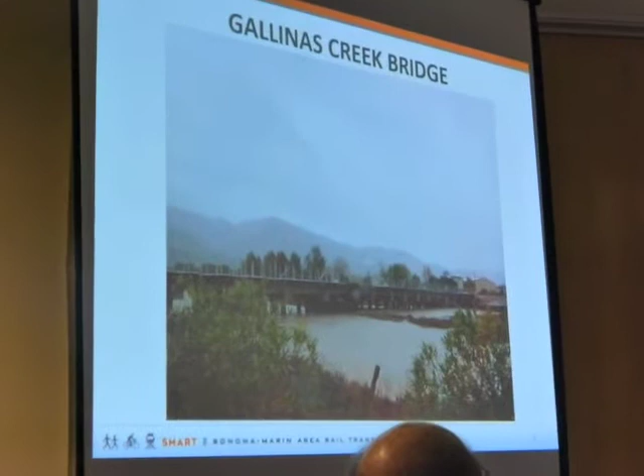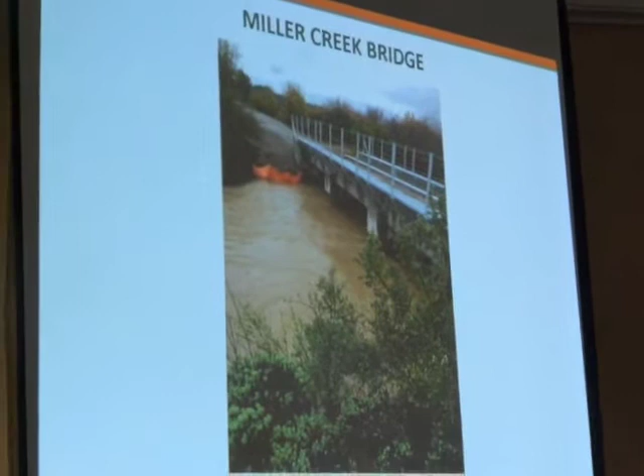Overall, our bridges did really, really well. This is Gallinas Creek down in San Rafael. We raised this bridge about 3 feet - you can see there's all kinds of freeboard under the bridge. Worked fabulously. Miller Creek, another success story - again, we raised this bridge about 3 feet. It used to go completely underwater before being replaced.

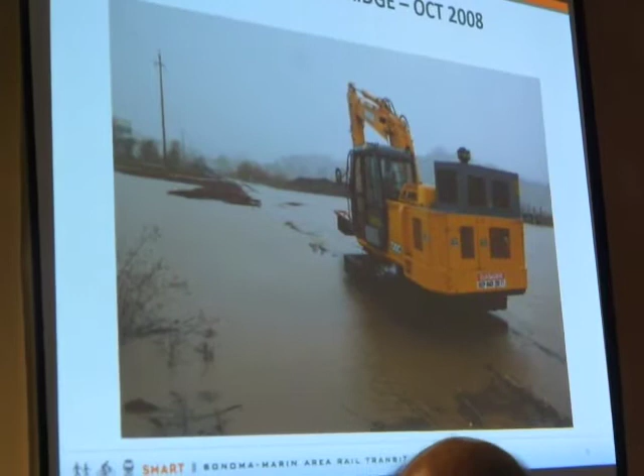Novato Creek - this is just back in 2008. Believe it or not, there is a bridge underneath there, you can sort of see the rails poking through. And here it is last week, accommodating all the water we had with room to spare.

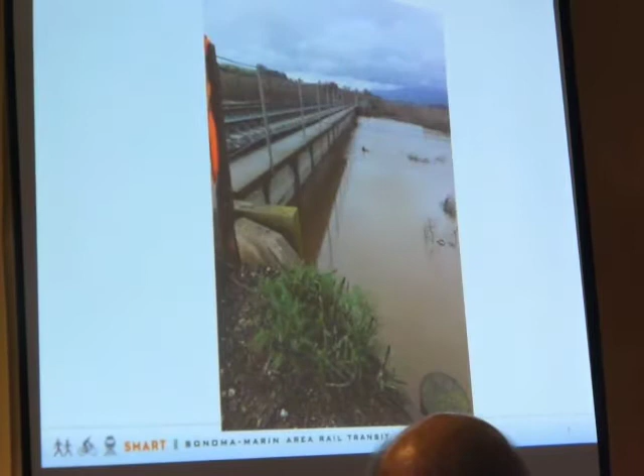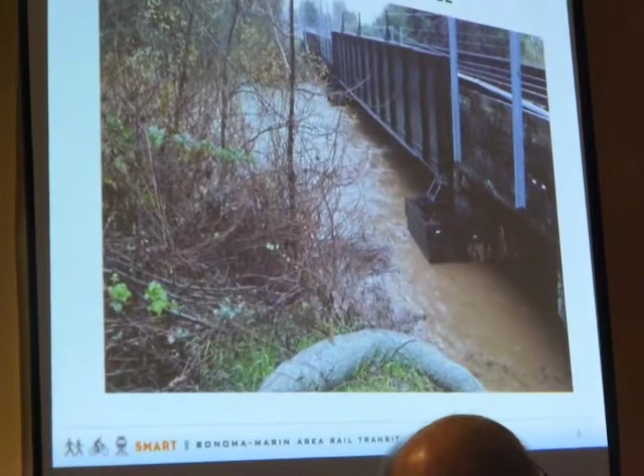Schultz Slough - this was a bridge we rehabilitated just north of the county line. Again, an area that's low-lying and sees a lot of water. And Mark West Creek Bridge, just south of our operations facility in North Santa Rosa. To put this into perspective, the bottom of the steel beam is probably about 15 to 18 feet above the bottom of the creek itself, so there's a lot of water moving through there.

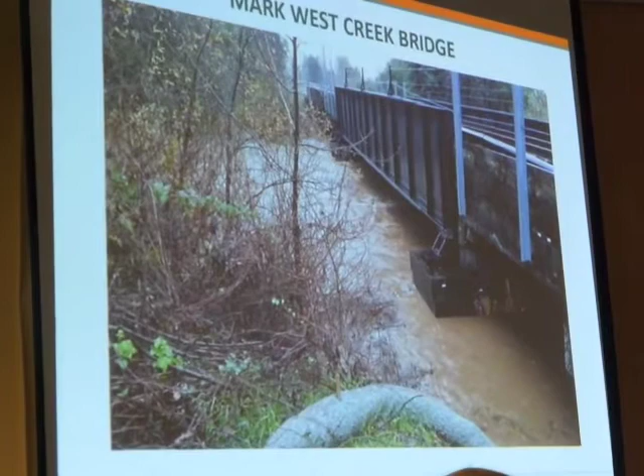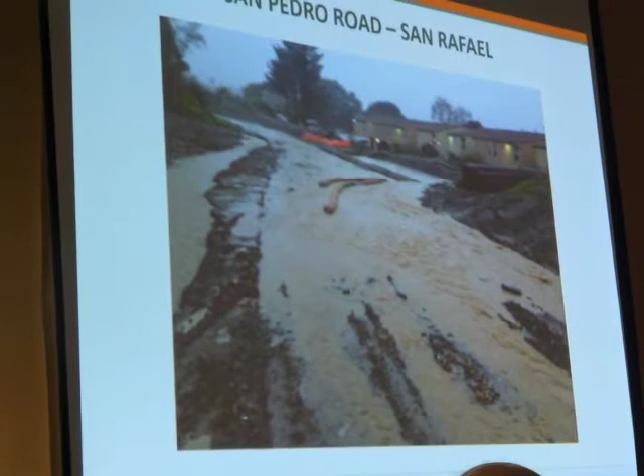So then we had some areas that really saw a lot of water and had some issues. This is San Pedro Road looking south - an area where we haven't finished our construction work. We haven't built track yet, but you can see there's a tremendous amount of flow going through there.

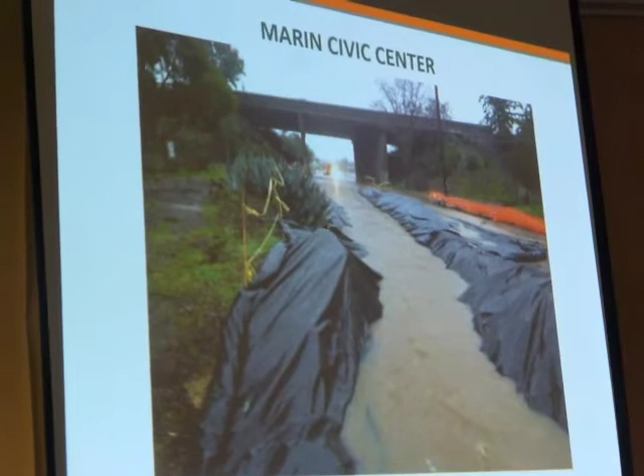Civic Center area, again an area where we haven't finished construction. It's low-lying and close to Gallinas Creek. Historically it's always seen a lot of water - nothing new for us. We haven't finished construction there. We're limited in what we can do because of the constraints of the adjacent roadway, but it's an area to keep watching.

Another shot of Civic Center Drive - the amount of water was unbelievable.

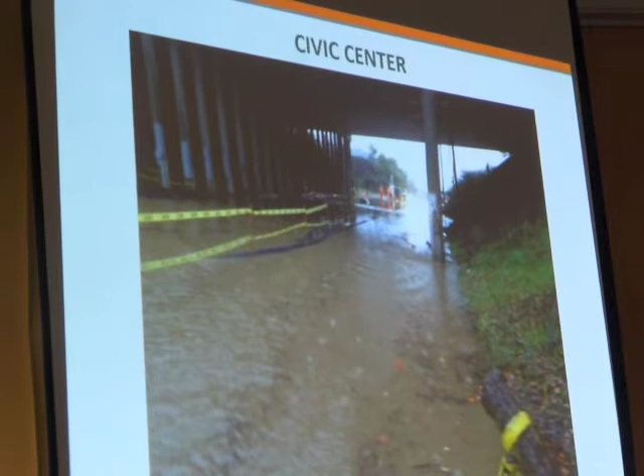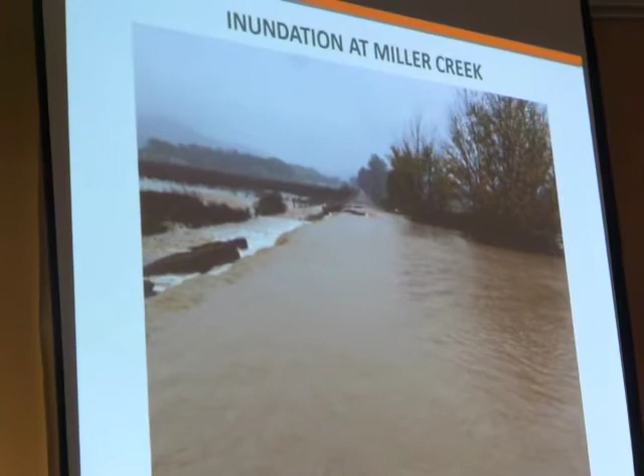This is just south of Miller Creek. Miller Creek had topped its banks. We're actually standing where the track would be constructed, looking south along the track there, and that's all water that completely washed over the top of our embankment. We hadn't built track yet, and that's the result - so an area that certainly needs some attention. Fortunately we haven't built track or finished construction there, which gives us an opportunity to address things like this.

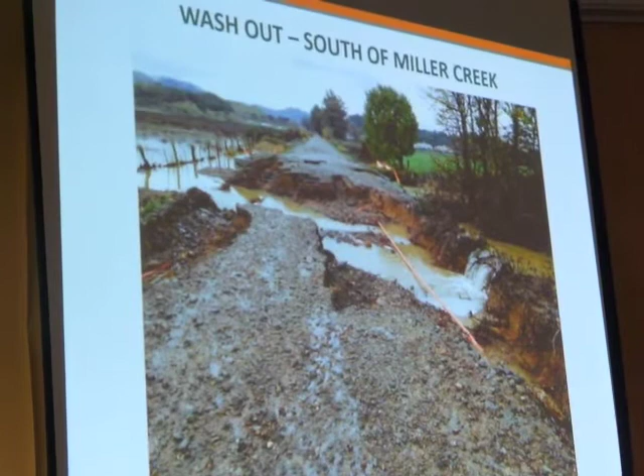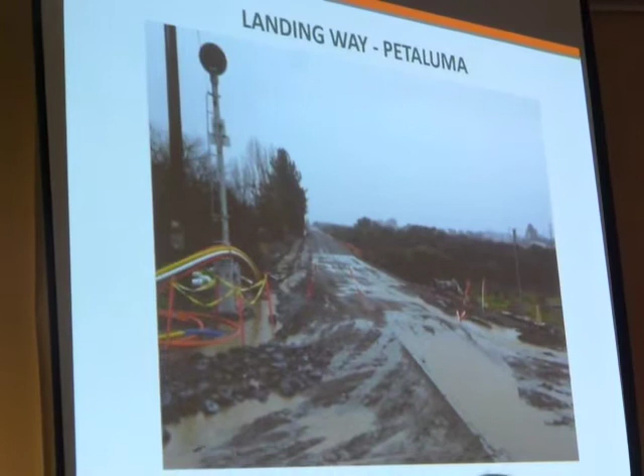Landing way here in Petaluma will always be a challenging area. Again, it's a very low-lying area. Drainage is a challenge - there just isn't much slope there, and it's also dependent on the Petaluma River because that's tidal and can only take so much water at times. Just a few more shots of the water accumulation there.

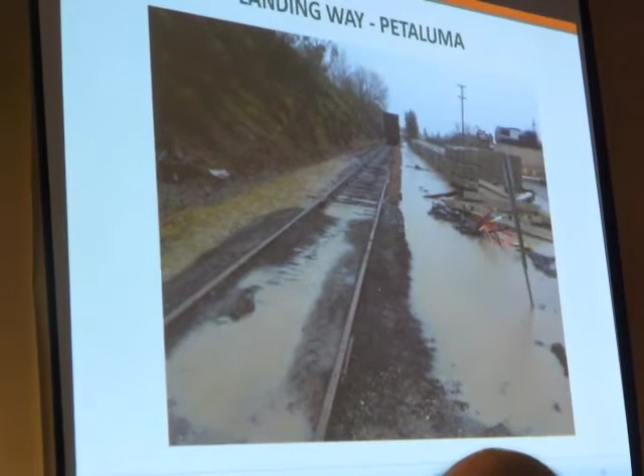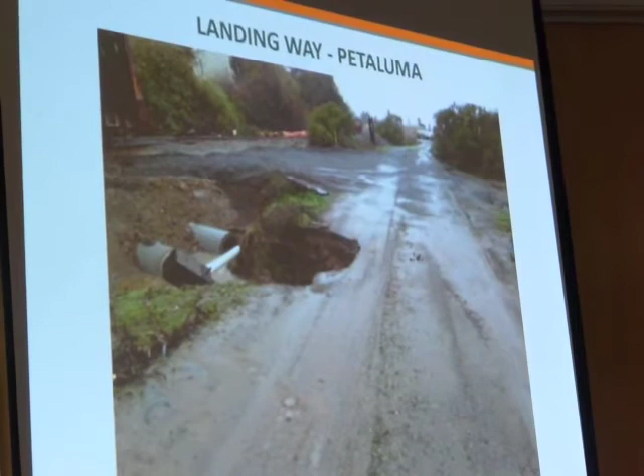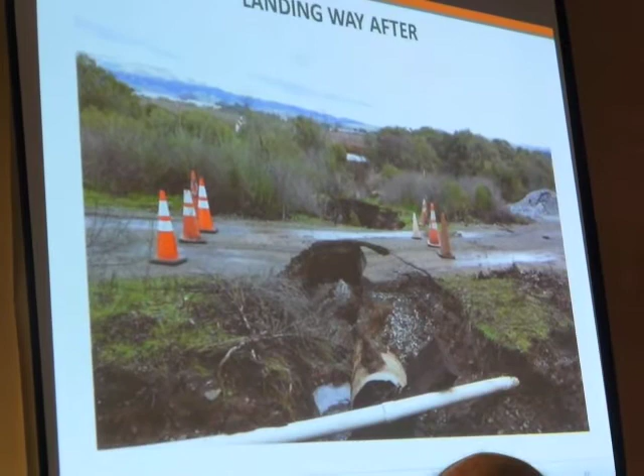As Farhad talked about, there are areas where we can only work within our right-of-way. So here, our track is in the background. We've replaced culverts to accommodate the drainage we can, and it's draining, working its way towards the Petaluma River in the background. This area has also been interesting because Caltrans is doing a lot of work nearby, and they've picked up a lot of roadway runoff and channeled it through our right-of-way to work its way out to the river too. So we're going to work with Caltrans and take a closer look at this area as well.

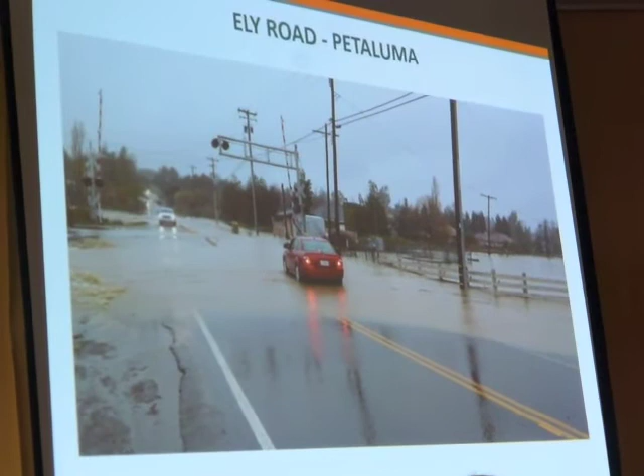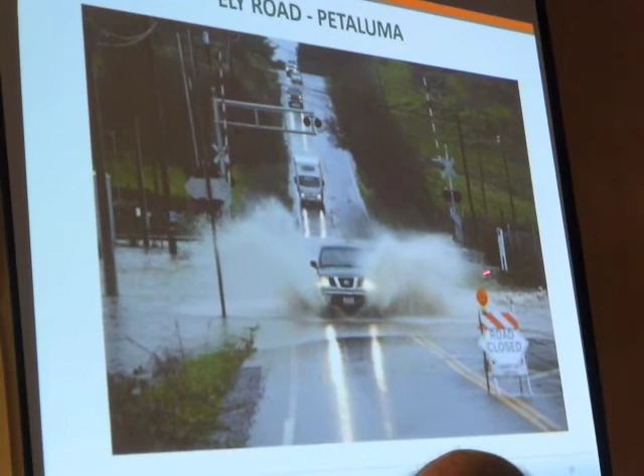Ely Road, just up the street here, saw an awful lot of water. The county actually closed the road because they felt it was too much water to be safe. Our tracks are in the background here, and as Director Rabbitt pointed out, we did have a small washout in that area, so it's another spot we're going to go take a look at and work on.